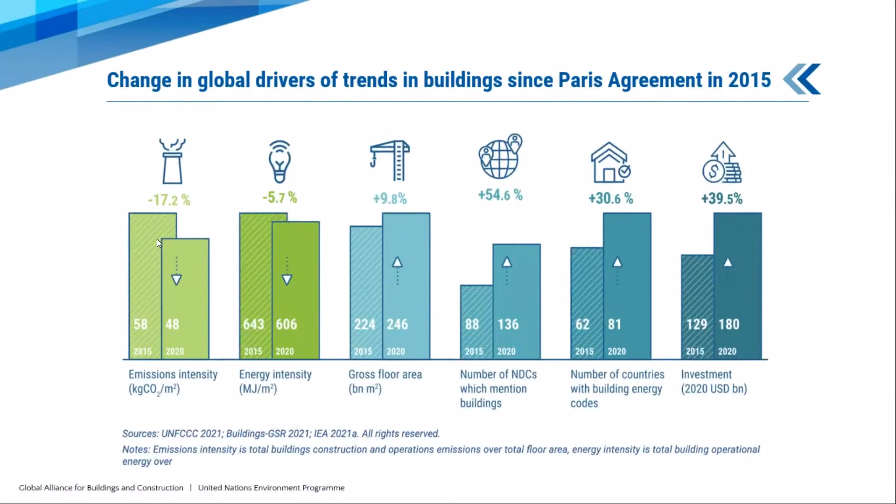Also for building codes, energy intensity is down, emissions intensity is down. So the point I'm trying to make is we're making progress—the direction is right, but the speed is not. This graph illustrates that the speed is not right. We need to do much more, and we need to be much, much faster.

This is our global climate tracker that BPIE has developed for the 2021 release of the Global Status Report for Buildings and Construction, based on data from 2020. What you see here is that if we want to achieve zero carbon building stock by 2050, and if we ignore the fact that 2020 was a strange year due to COVID, it actually looks as though we are on track. But if you calculate the COVID-19 impacts out, we are far away from the track. So we do need to move a lot faster.

Allow me to say, before I move to the social figures, that the 37% of energy-related CO2 emissions figure, which was already mentioned and is correct, is actually very likely an underestimate. We're probably looking at a higher percentage of emissions, because things like bricks or chemical reactions from cement production related to clinker are not included in that. I just wanted to mention that.

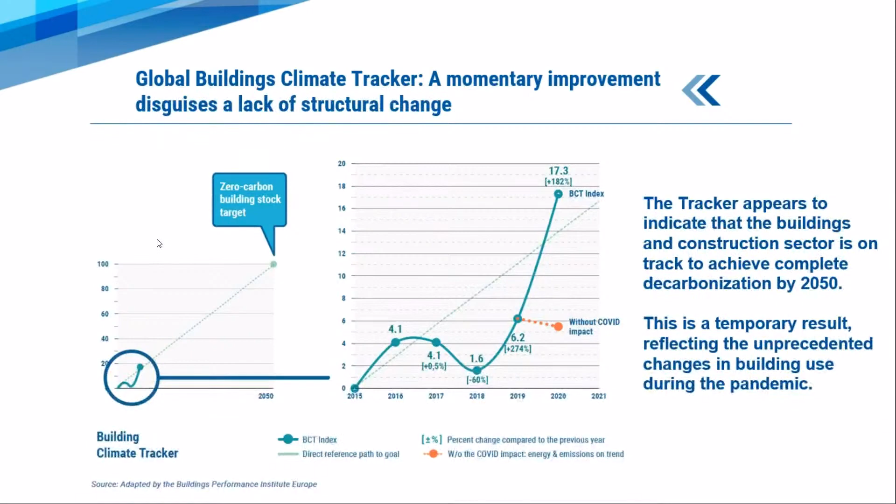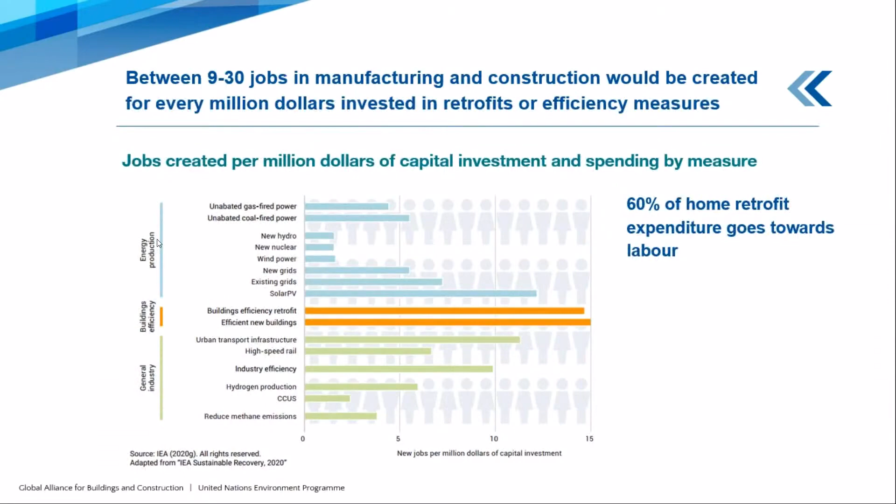In terms of jobs, we're looking at 9 to 30 jobs created in manufacturing and construction for every $1 million invested—that's a lot more than many other sectors. And at least for Europe, 60% of home retrofit expenditure actually goes towards labor. So there is really a strong sales point here to be made—it's not just, quote unquote, about climate. It really also is about livelihoods and jobs.

Here you can see a slide about codes. I mentioned earlier that the number of countries with building energy codes in place is also growing. That is good. What is not good is that the percentage of countries with mandatory building energy codes for the entire sector in place is only 22%. So really, it's not sufficient, and we need to move much faster. Building energy codes are a very important pillar to push the market forward.

It's very different by region. For instance, in the MENA region we're at 44%, so their enforcement is a bigger issue. In Africa, we're at 9%, and in Africa, of course, we're looking at massive construction growth in the next decade. So this is very important.

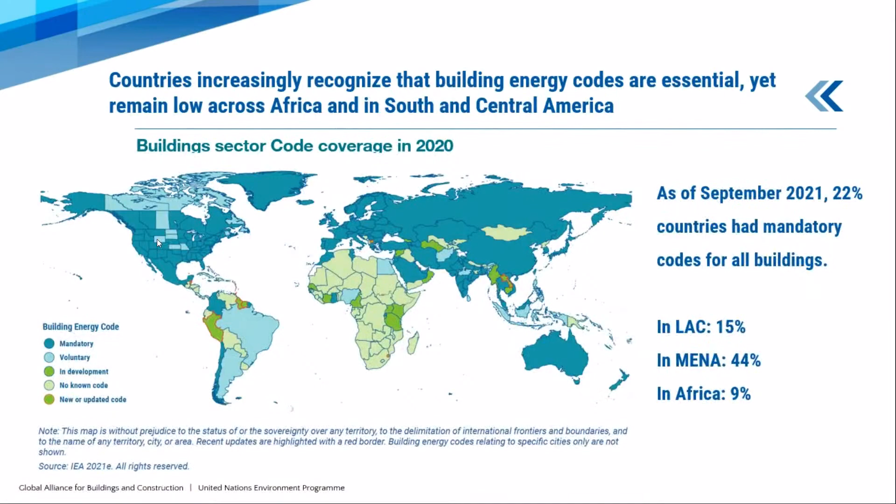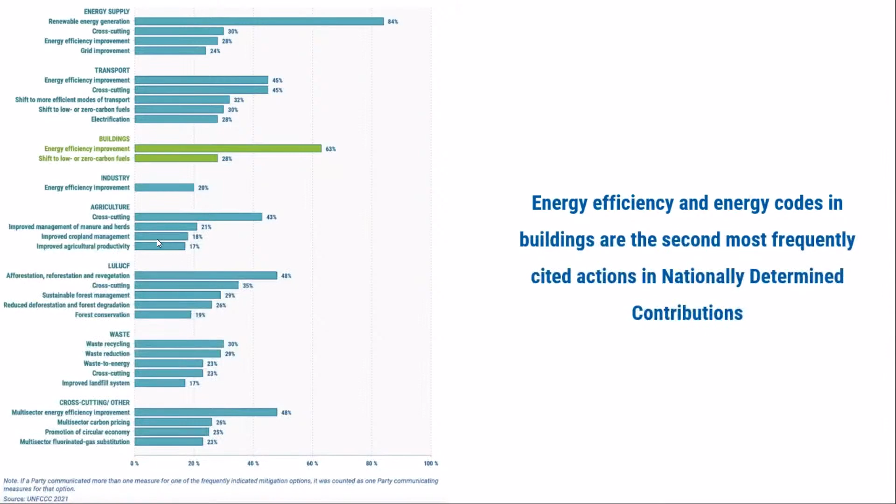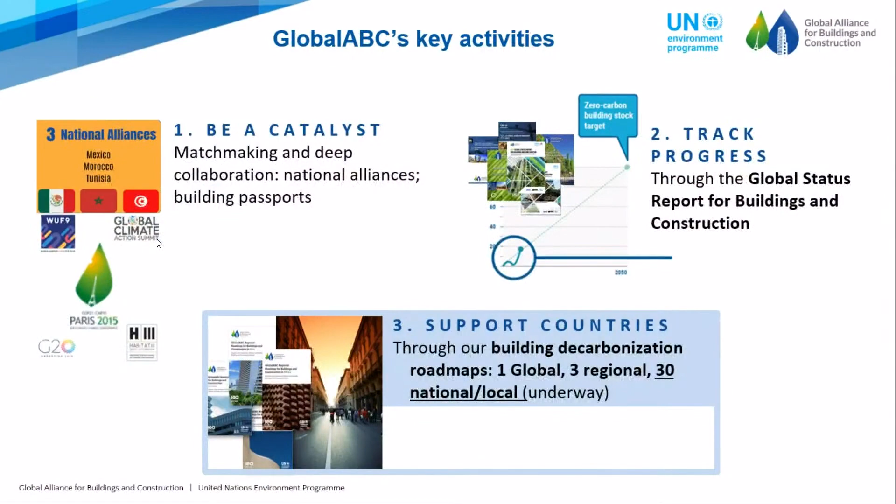I will skip over this because Monsieur Crouzat already mentioned it, which is fantastic—the fact that energy efficiency in buildings is often the second most mentioned measure in NDCs. So let me go straight to the roadmaps, and that will be my last point. The Global ABC also works with countries through building decarbonization roadmaps. We now have a global roadmap in place, and three regional ones for Africa, Asia, and Latin America, fully recognizing that these are vast and diverse regions.

We developed these with the input of 700 stakeholders from all around the globe, which in our minds gives it a certain degree of legitimacy. The idea is that we need to transform the sector through 8 key areas: urban planning, new buildings, existing buildings, operations, appliances, materials, resilience, and clean energy.

Each of these have targets by 2030 and 2050, and each have priority technology and policy measures. Now we're breaking this down, cascading it to the sub-regional, national and local level. This is, in our minds, a very hopeful thing. These roadmaps are often associated with the country's NDCs.

We're working, for instance, in Vietnam and Cambodia, and the processes there are almost finalized. Some of our members, some of our countries, are beginning to take this roadmap model and apply it themselves, which I think is very good. It's a sort of franchising. We think this is fantastic.

Of course, this is all in the public domain. The UAE, for example, has taken this model and is currently developing roadmaps for 22 Arab states themselves, and we are very excited about this. This will also be launched at COP27.

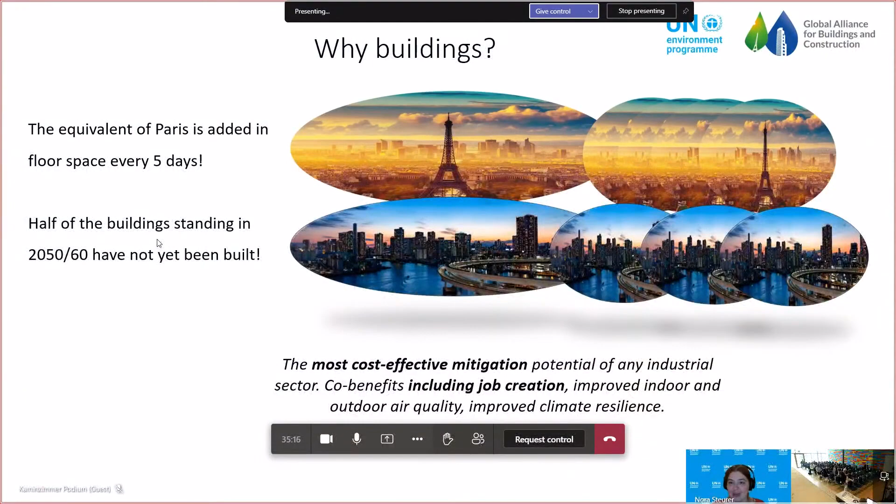Thank you very much. This was not an X-ray, it was an MRI of the building sector. I invite everyone to really go and read the global status report, because it is very rich, and it is incredible what this group of over 250 members have reached to do in such a short time. It's 7 years since the Global Alliance was created, and it is amazing.

Thank you, Nora, for that. And I would really like to say a special hello to Jigme, a former colleague of mine. Jigme knows a lot about NDCs, long-term strategies, and especially a lot about the transparency framework, which is really the backbone, what is at the heart of the accountability system of the Paris Agreement. We are now going to hear from Jigme, manager of the Transparency Division at the UNFCCC, about what climate action in the building and construction sector in the context of the climate change negotiations, what we must know about this.

Jigme: Thank you, Mariana. Ambassador Crouzat, fellow speakers, dear distinguished participants, both in person and those connected remotely. Let me first extend a very warm welcome to Bonn on behalf of UNFCCC Secretariat. I know it's Saturday, quite late in the evening, so I hope we can close this so that we can enjoy nice warm weather outside.

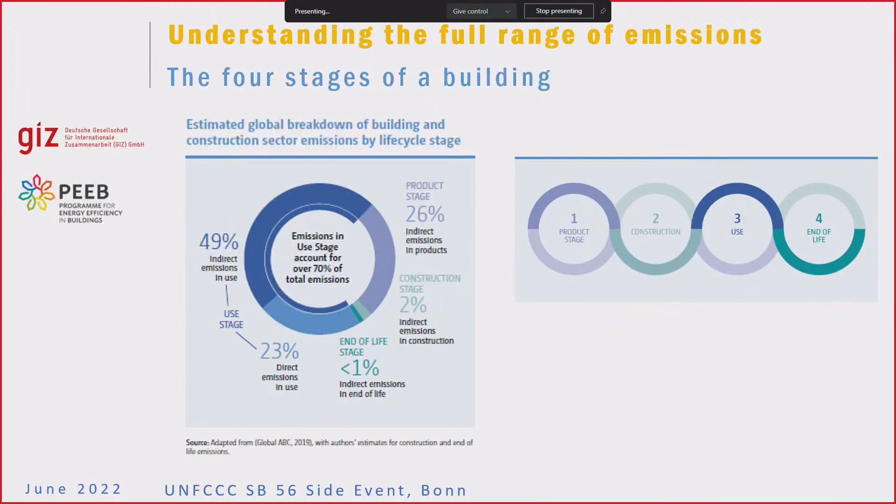If we then look at the different life cycle stages of a building, we have the product stage, the construction stage, the operational or use phase, and the end of life. It's important to recognize that the construction process itself and the end-of-life impact are relatively small. I'm not saying they should be neglected—of course they have to be addressed as well.

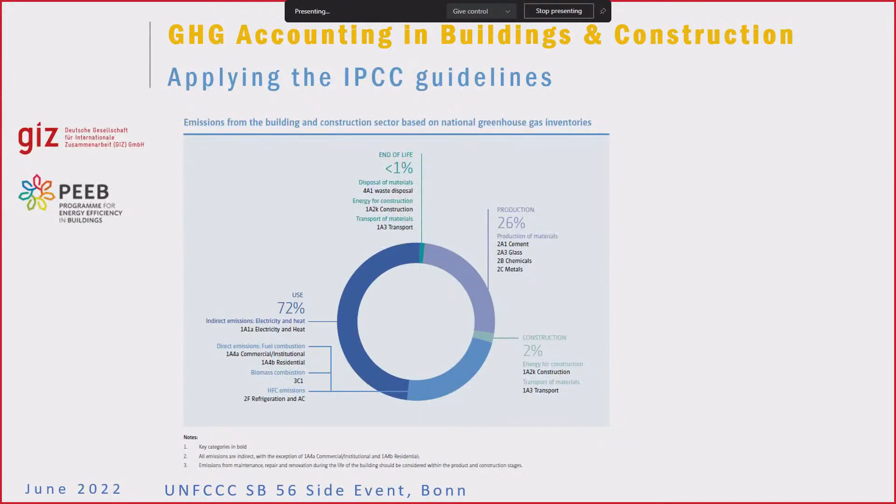But if we ask where we should prioritize actions, it's clearer that the use phase should be priority number one, then the production phase—production of building materials like cement, glass, steel, bricks, whatever is used. Priority three should be what's happening on the construction side and at end of life.

The end-of-life challenge raises the question of to what degree we can really move toward a circular construction industry. That's a debate which is only just starting, because it creates many challenges around whether building materials used in one building can be used again in another. I know France is taking that approach very seriously and developing policies on it, but it's not trivial.

That's clear. So when we look at the different stages of mitigation actions, the compendium includes this cycle—a never-ending story. It's important that a country first quantifies the impact and emissions coming from buildings and construction, then goes through the stages of identifying priorities, developing policies, monitoring those policies, and collaborating with the construction industry and other stakeholders.

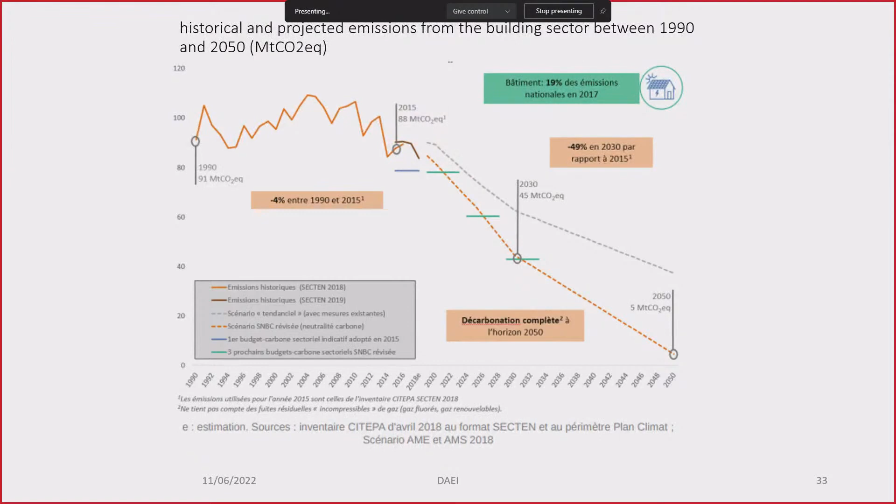So next one. That is embedded in what I said in our national policies. This National Low Carbon Strategy and Multiannual Energy Program are 5-year programs that are reviewed. And I want to say that from next year, all that will be coordinated into an energy and climate programming law.

That means including adaptation. And one part which I wanted to highlight is the ambition to decarbonize the heating of buildings by promoting renewable energy in district heating, by substituting coal-fired heaters or oil-fired boilers, and promoting efficient home wood heating systems as well.

So in France, we have around 10 million, or 9 million, homes that are partly or fully heated by wood. And we have the aim to stop using coal or domestic fuel oil for heating at the end of this decade. Next.

So, as was said, energy efficiency first is our policy. It's a European framework, but the ambition is to divide by 3 the energy consumption per square meter of the building stock. It's a huge challenge that requires us to mobilize between 20 to 30 billion euro investment per year, leading to financial support around 4 billion per year, which we are almost there.

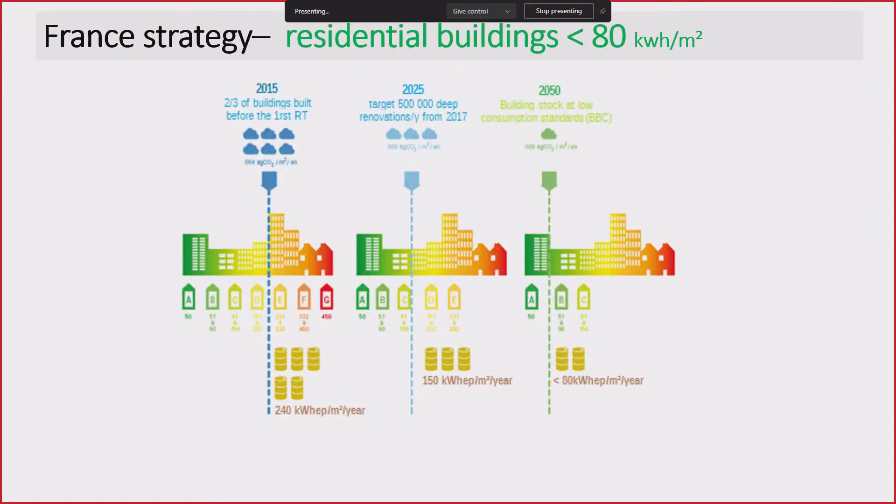So that means we have the policy settled, and now we have to deliver. Next.

Energy renovation plan, I would highlight 3 tools that we use. The energy renovation plan aims to ban or eliminate thermal colanders, especially for renovation of low-income households, and a progressive ban has already been decided from 2025 to 2034.

That is very interesting to understand: in France, for instance, we have around 8 million people living in very low-efficiency housing or buildings. And that is the priority of French policy, to focus on this population or type of building that is very, very low efficient. But French policy is based on means to build trust.

For that, it has been decided to promote a certification for enterprises that certifies the quality of work they can provide, the RGE label, as well as a network of one-stop-shop assistance called France Rénov, that now gives all the assistance points for households. So it's very important to have a simple access to information as well. Next, please.

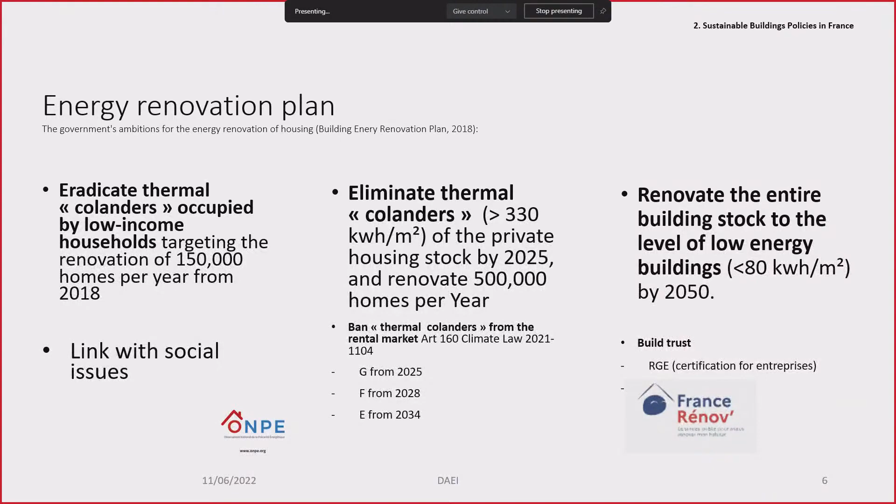So one thing that I want to highlight is the new regulation that is now in force since January this year. That's been one of the first regulations, maybe the first in Europe, including a mandatory threshold of carbon for energy and construction. That's interesting, as it will lead to a decrease of 30% of carbon embedded in construction from now to 2030. Another point is that we include a first attempt to integrate the evolution of the climate. That means we don't use the historical climate to design summer comfort in new buildings, but we take as a reference the last heat wave in 2003, which was the highest registered temperature in France for a long period. So that's now a way to adapt the new design to the future climate.

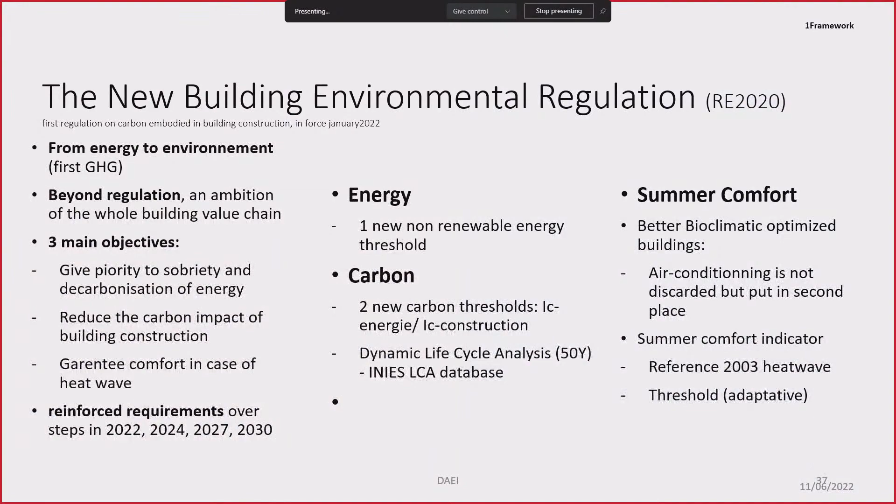Next slide, please. And one thing is important: not to focus only on housing, but as well on tertiary buildings. And I think that is a very interesting way to design policy. First, it has been a voluntary engagement from tertiary building owners or managers, that was the first step, to set some mandatory threshold for all buildings over 1,000 square meters, with a progressive reinforcement targeting a 40% decrease in 2030, 50% in 2040, and 60% in 2050. That means all buildings in France now have an obligation to reduce their energy consumption. And the penalty, if it's not achieved, is based on administrative penalties for building owners, per owner and per building, and is based on an obligation to report energy consumption on a database operated by the French Agency for Environment.